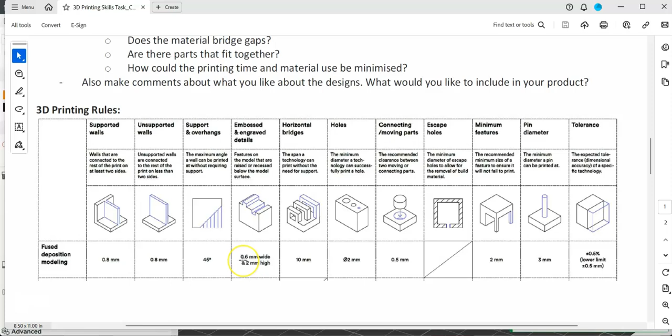On our contact sheet, we have this design printing rules or 3D printing rules, and there's a few we need to try and keep a watch on.

Firstly, all our wall thicknesses need to be more than 0.8 of a millimeter. If there's any areas less than this, the slicing software might eliminate the wall completely, thinking that the printer can't actually achieve it.

This one here I'm going to talk about a lot, so supports and overhangs. We want to try and design our work so we can print without supports. It saves a lot of material.

So when we're designing, maximum overhang that we want is 45 degrees. As the printer prints each layer, it can support itself if it's going out slowly, but if it goes out at a 90-degree angle and there's a step, that material can't print in midair.

If you want any embossing, like our name or small little bumps outwards or inwards, we want to go anywhere between 0.6 and 2 millimeters. Just very small details won't print, so you want to keep to those sizes.

Here's another important one, horizontal bridges. If I've got two sections and an undercut above it, if it prints between two uprights, we can do that, but if it's more than 10 millimeters across, it will start to droop, and then the next layer tends to start to fail on the printer.

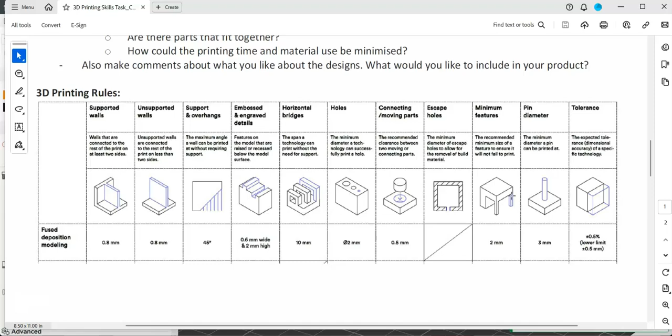So keep referring back to this. I'm going to slice this preview of a phone stand.

You can see on this phone stand, the red areas are the top layers, they're good. The blue areas are undercuts. We've got this massive undercut just sitting here, and we've got a small undercut just under the name and on top of this circle.

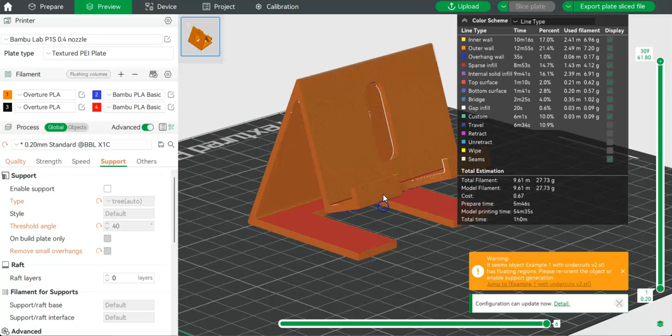If I put on supports now, so I turn on my tree supports, it's automatically generating, and I'll slice this model again. It will automatically put these tree supports in. So you can see the tree supports, they start at the bed and work up and support that overhanging material.

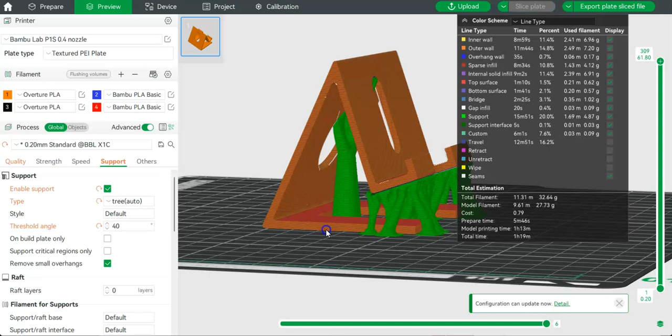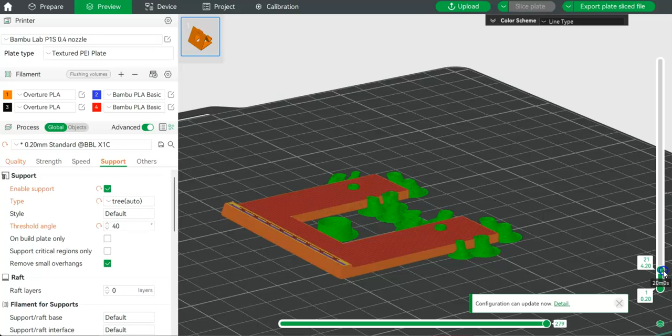I can preview this layer by layer. So you can see this is the first part of what will be printed on the 3D printer. We want a nice flat bottom so it sticks to the bed nicely. Then as it starts printing upwards, it's very easy for it to print this bottom section.

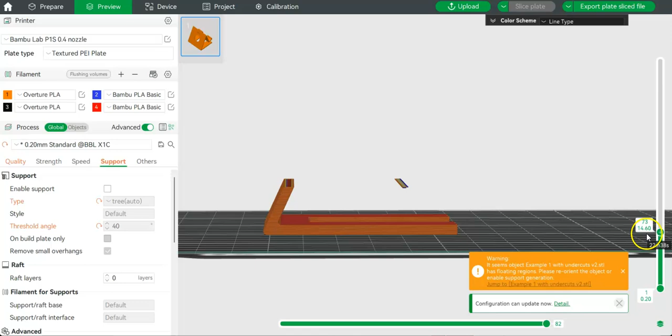I've just turned off the support to illustrate this a little bit better. So as I come up, you can see that the material is being printed layer by layer on top of each other until I get to this point where it starts to print in midair. If that started to print in midair, it would just drop down and the print would obviously fail.

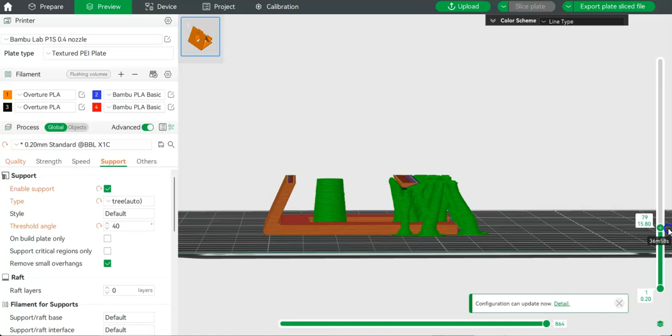It would keep printing this part because it's supported underneath and it's not going out more than 45 degrees. I've reactivated the supports again to illustrate now how the actual software compensates to support that build as the layer by layer goes up.

You can see this big support in the middle here as it keeps going up. That's really only there to support my name that I've got extruded outwards on the top.

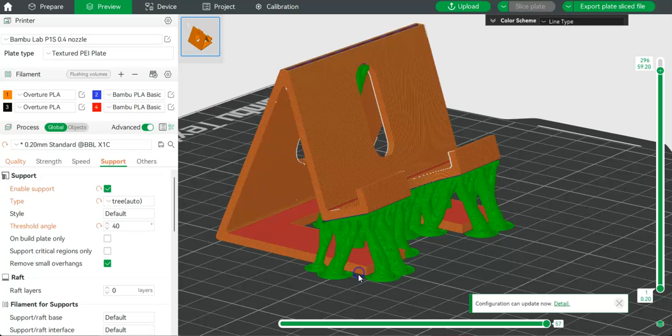Now let's talk about different ways we can minimize the supports. Firstly, what I'm going to do is go back into my model mode and rotate this model.

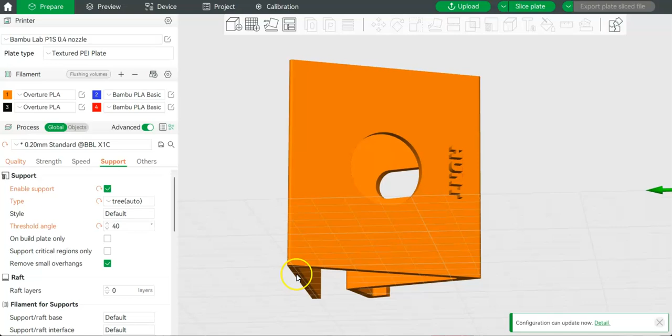Now I've rotated the model 90 degrees. You can see it's got a nice flat bottom that it's printing on still. It's going to print layer by layer, so the base comes up. It hasn't had a problem yet.

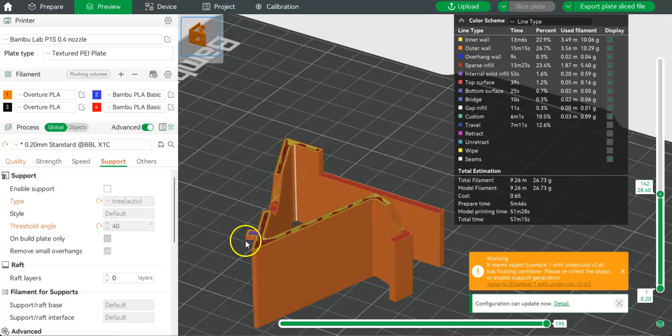Everything's fine, and then we've got the start of the letters here for my name. They're definitely not supported here, so the filament will be trying to print in midair.

This one here is a really big problem. This is what we would call the bridge. If we look at the design rules here, this is what's happening: it's way more than the 10 millimeters, so that will kind of sag through here and start to fail the print.

We've got another really big bridge, one just on the corner here at the front, which is an undercut. And this one here is an undercut as well. So there's no way that the printer head is going to go out onto that corner and print this one in midair, because there's nothing for it underneath to stick to.

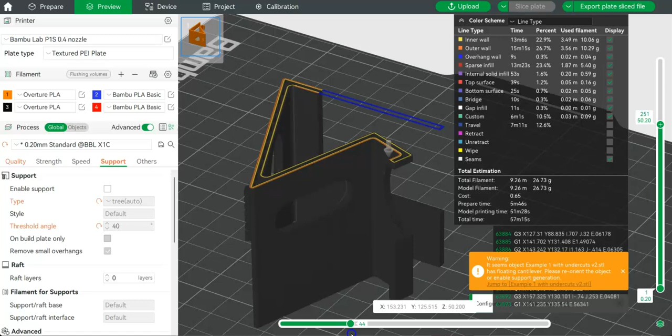So all of that material above that blue line there would not print. With supports on, you can still see those tree supports are quite a lot of wasted material. And you can see down here the total print time is 1 hour 10 minutes. It was 1 hour 19 minutes on the other configuration.

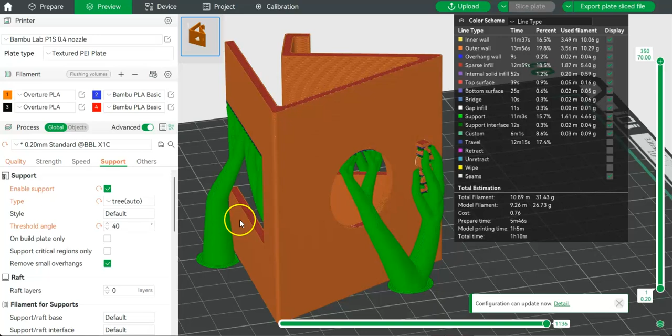Let's have a look at some other designs. This is the design in Fusion that I just showed you, and I saved as and kept editing in a different way, so it's nice to present several different ideas, not just your first idea. This one here, what I've changed is I've added a little support between here, so it creates two separate bridges that are smaller rather than that big horizontal bridge. Just remember that we're going to be printing this on the side.

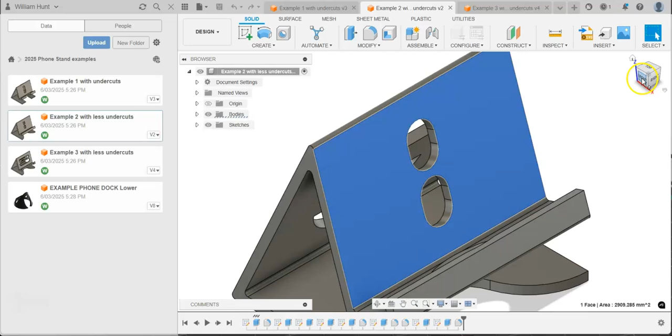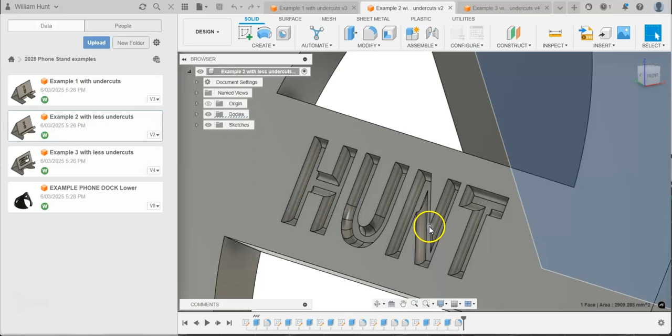So I've done the same here, so it'll be printing from this side layering up. I've changed my name to be an indented emboss, and I've also created a fillet on the inside of the emboss just to smoothen out the inside of the lettering. It's quite large. And the bottom, I've designed that quite differently, so we'll see how this one slices.

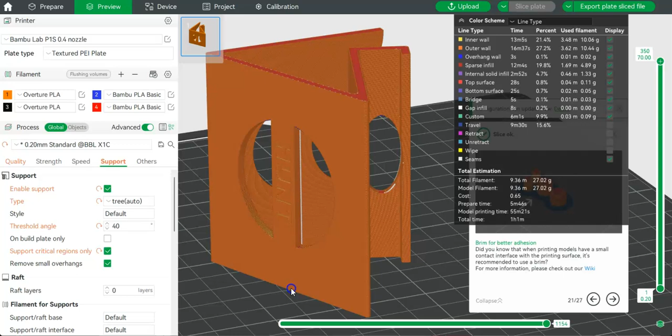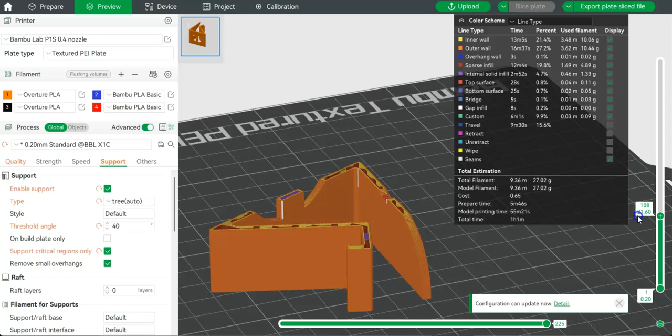Here it is in Bambu Studio. I've kept the supports on, just supporting critical regions, and it hasn't generated any of those tree supports. It means that we're somewhere close to where we should be. Same deal, you can see at the start it's printing nice and flat on the bed, and then it's coming up, well supported. You can see the opening starting to open up.

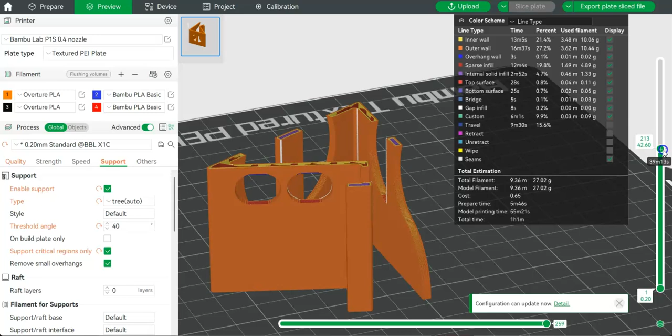My redesigned front there, and we're getting to the point where the unsupported material appears as a bridge, but because it's joining between these two sections and it's about 10 millimeters, that will bridge over okay with a 3D printer. As we keep going up, you can see the design coming together. There are undercuts, like a 45-degree undercut, which is within our rule. This is like this part here.

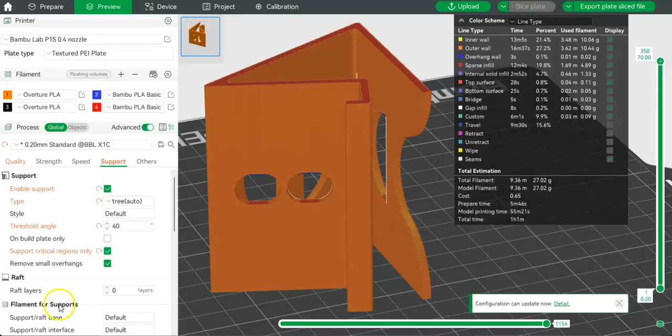And the material keeps coming up. So that's not a bad solution for the second attempt at my design. Back in Fusion, you can see my second attempt.

Let's open the third. So this one here, knowing that I'm printing it on this side for the base, I have made this a horizontal, which is going to turn into a vertical when it's turned over, and we'll see how this slices. I've made some modifications at the front to remove more material. I've rounded off the edges a little bit more, and I've also put a fillet on some of these sharp edges on the inside. I don't want to fillet the outside because I want this nice flat surface to start the print on.

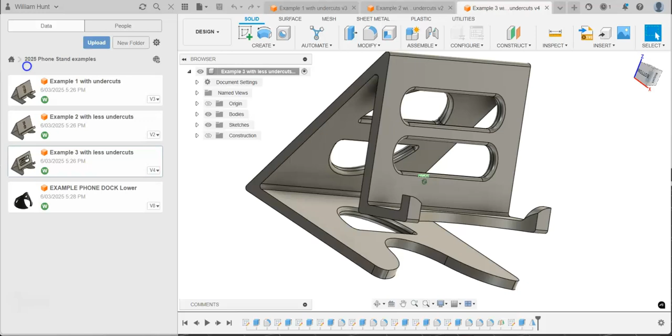Let's have a look at the back. So that's stayed much the same. So in Bambu Studio, let's preview this one. Flat bottom keeps coming up. I've reduced the material usage a little bit. This is quite a large tower. We want to make sure that it's at least 3 millimeters thick, so it's got enough rigidity so it doesn't wobble and fall over too much.

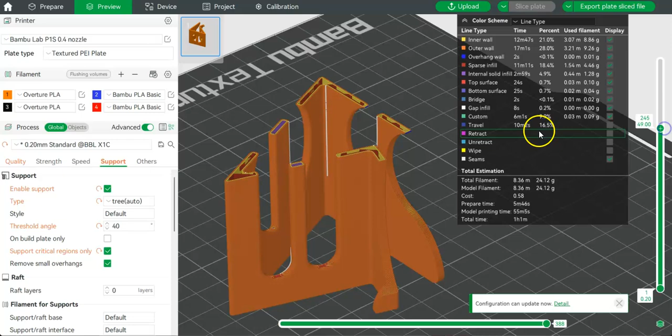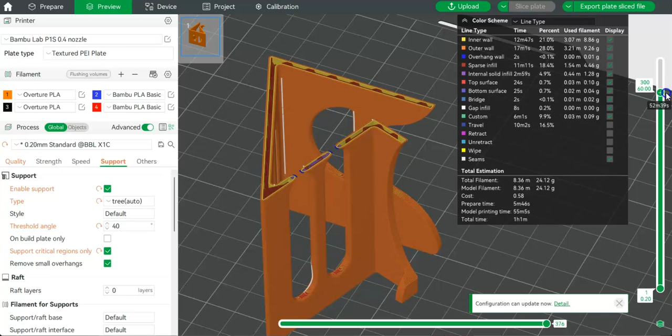Got quite an undercut forming here. So you can see this one here is really at 45 degrees already. So that blue area is a bit questionable, but I reckon it'd be worth having a print of that and we'll see how it goes. From here the material starts to join itself, and then it finishes off.

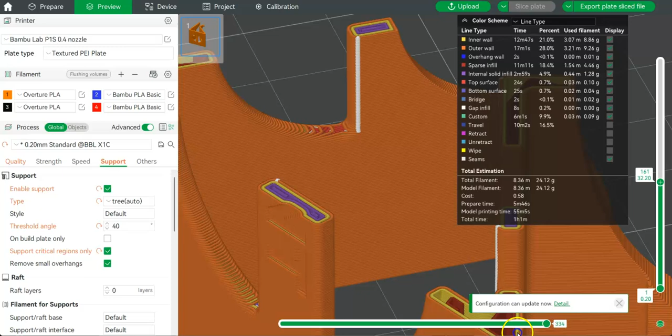Let's have a quick focus on where the name is here. So you can see it's kind of indented a little bit, and I've really softened the bottom of that. So as the printer comes through and does these letters, you should be able to see the preview of the head here, and it just kind of dips in each layer as it builds up.

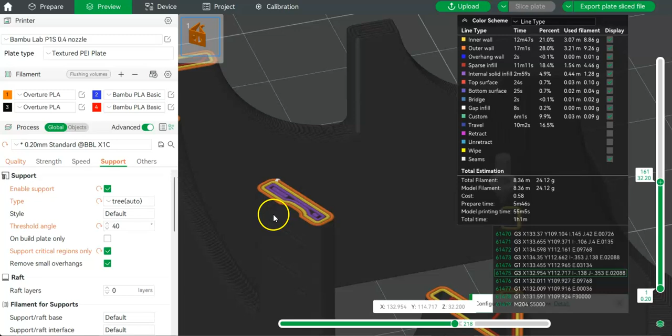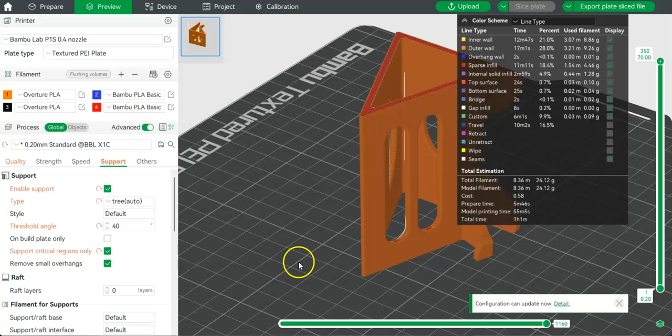So that should be achievable to see that lettering on the side, and it just needs to be nice and big and bold. Maximum indent is about 1 millimeter, and then it doesn't need supports. The print time here is down to about an hour. It's nice not to have those supports all over the place, because you have to break them off, and there's a bit of post-production work that you have to do. If you are trying to print these off to sell them, you want them to come off really nice and clean off the printer, ready to just package and sell.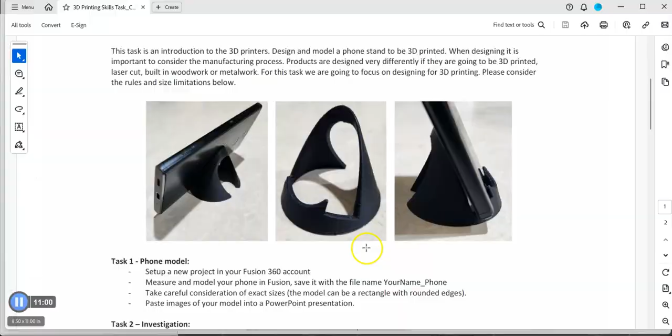The last design I'm going to talk about is the one on the context sheet. Before I analyse the design, let's have a quick read of this. So when we did our investigation, we were looking at: do the designs have a flat base for printing? What thickness are the walls? Are there any overhanging areas while it's printing? Does the material bridge in any of the areas? Are there gaps? Are there things that fit together? And how could the printing time and material be minimized?

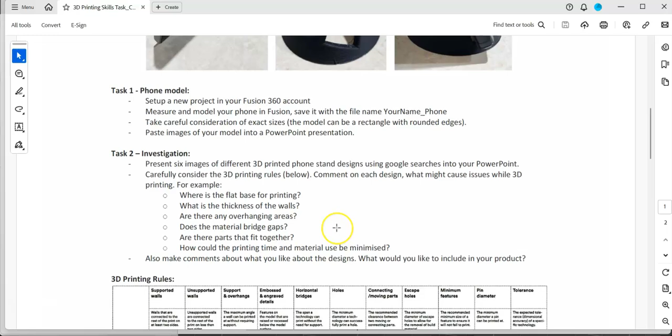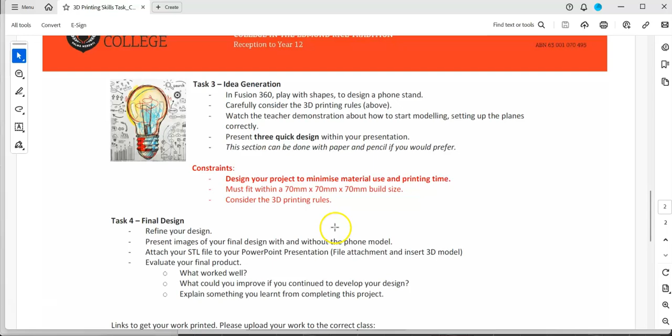Another key thing is this one in red. We want to try and minimize the printing material and the printing time, and your design should fit somewhere between 70 by 70 by 70 millimeter build size. That is quite a challenge to design a phone stand in that size, but this one's a good example of a successful design.

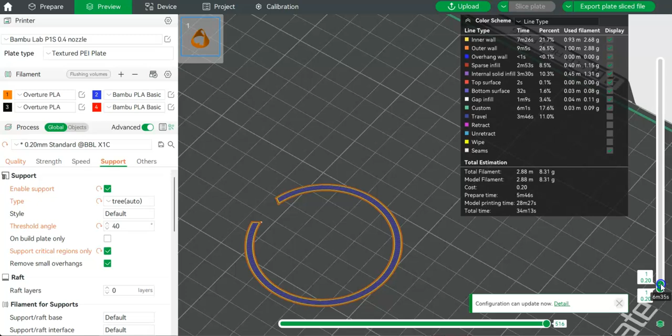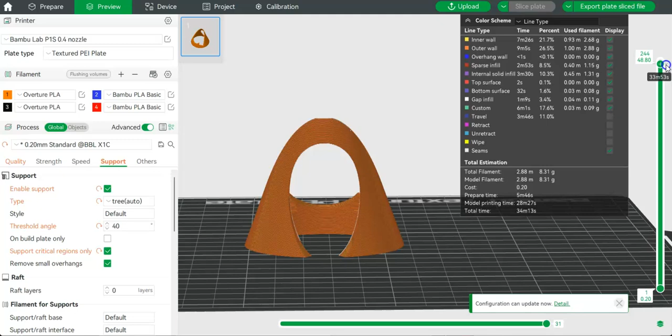There is a section at the back here where it gets pretty close to that, quite a big overhang. And those two pieces come together as a little bridge there. Keeps printing. Now this print is down to 34 minutes. So it shows that you can create a stand that prints quite quickly and serves the purpose for what the design brief outlines.

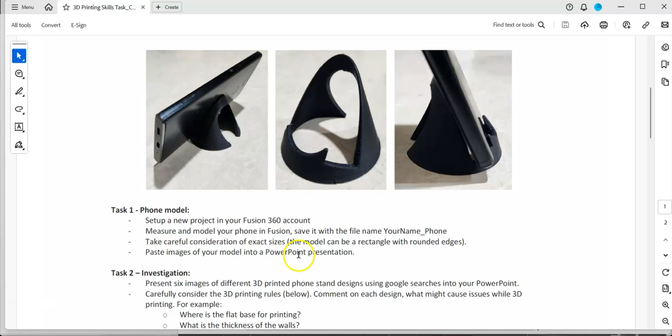I hope the video has been helpful in designing for 3D printing. The one piece of advice: if you keep coming back to these design 3D printing rules, they'll definitely help you out while creating your models for 3D printing.